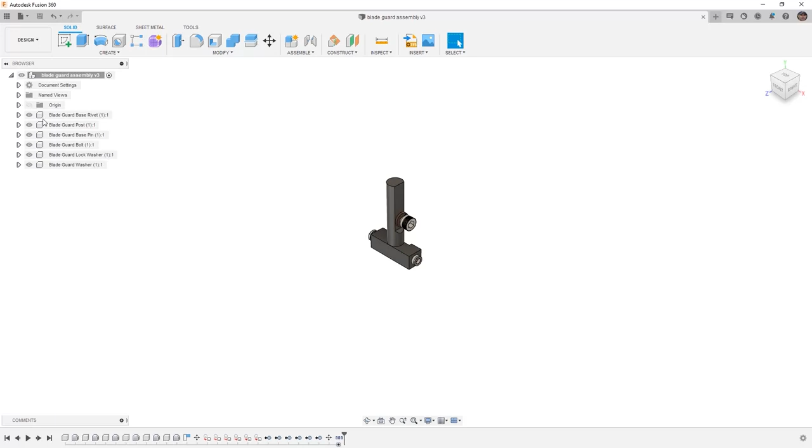To do this, I'm going to go into my drawing workspace from Design. We're going to be using the full assembly, creating a new drawing from scratch, and then we need to pick the standard, the units, and the sheet size.

We have two options for standards, ISO and ASME. The ISO is the International Organization for Standardization, and ASME is the American Society of Mechanical Engineers. This follows the ANSI format of standard. There are some basic differences between this selection, so it's important to understand which one you need to use.

ISO dimensions are going to be placed above the dimension line, while the ASME standard places them centered. ISO dimensions are parallel to the dimension line, while the ASME standards are horizontal. And in general, the ISO standard tends to use symbols, while ASME tends to use abbreviations. Of course, there are many more differences between the two, but those are some of the basics that you might notice when you're creating your drawings.

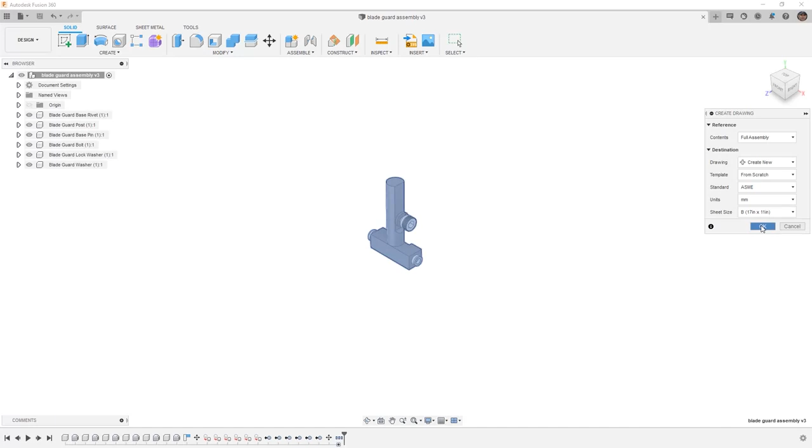For this example, we're going to use ASME, millimeters, and we're going to use the B sheet size and say OK. Once the drawing is created, we need to start by placing our first view.

I'm going to place our first view from the front view in the upper left of our drawing. We need to determine the style, the scale, and edge visibility for our design.

The edge visibility, by default, the tangent edges will be off. We can have them shortened or full length. It's going to depend on what your requirements are. We also can turn on interference edges and thread edges if needed.

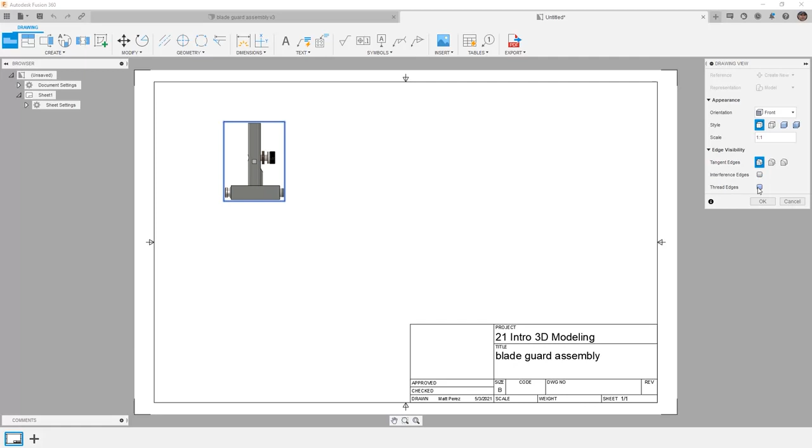We're going to say OK and place our first drawing view. Once we have our first drawing view, generally what you would do is select the view and you would create projected views. For us, I'm going to project this out to the right, and then I'm going to project an isometric view down and to the right.

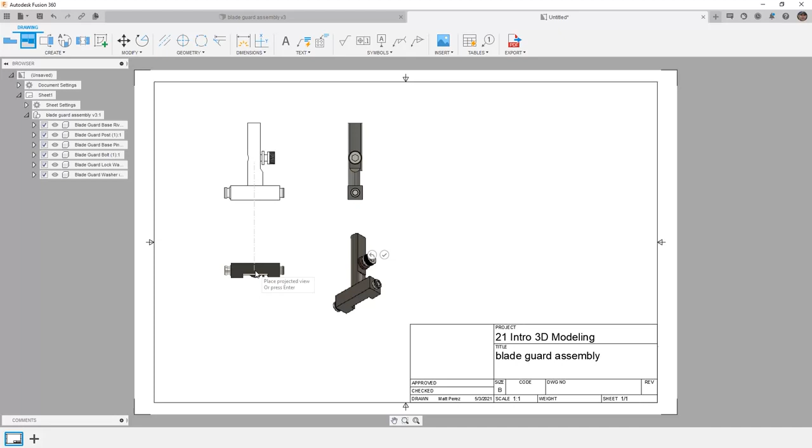We could also project a top or a bottom view. Again, it depends on what your base view is and what your requirements are.

Once we're happy with our views, we can select the green check mark, or we can right-click and select OK. By default, each of these views is going to get its scale and its style from the parent view. If we want to change that, we can double click and we can modify any of these parameters.

For example, if we wanted it to be shaded, or if we needed to change the scale. For now, we're going to leave all of ours the same.

Let's take a look at some of the other views that we can create. We've got our projected view, which we've already created. And then we also have a section view, a detail view, and a break view. The break view is handy if you have an extremely long design, such as something that contains a weldment or a large beam. It doesn't really apply to our design, so we're going to focus on section view and detail view.

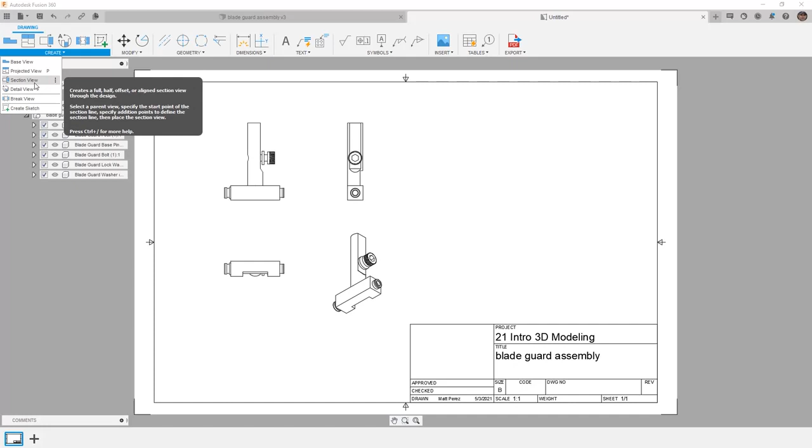I'm going to create a detail view, and I'm going to focus my attention in on the bolt. So I'm going to select the view that I want, and then I need to select the center point of a circle that I'm going to draw, and then I can place this view.

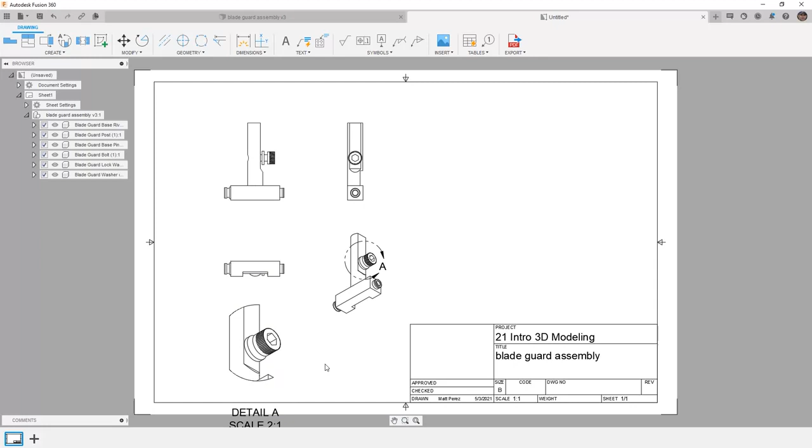I'm going to place it down and to the left, then I'm going to say OK. If the note is off the screen, we can select it, we can hold down the left mouse button on the gray box, and then we can move it to a new position.

Now we have a 2-to-1 detail view based on what we drew from our isometric view. If we want to resize this at all, we can modify its position and have it update the scale and the detailed drawing. From here, let's take a look at creating a section view.

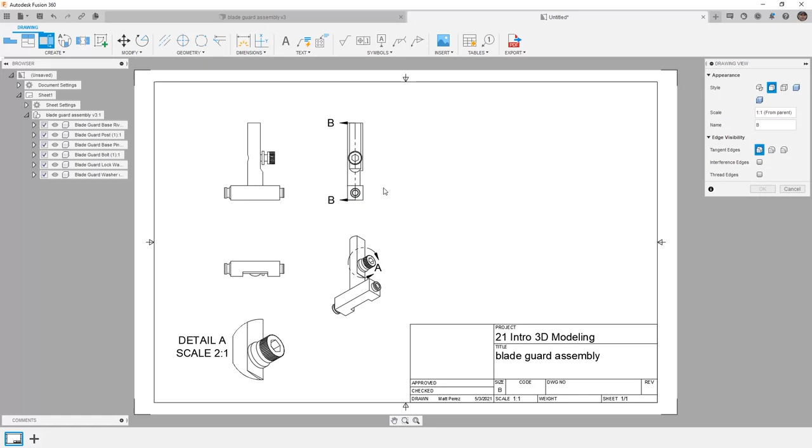Once again, we'll need to select a view, and then we'll need to draw a section line. Once we're happy with the section line we've drawn, we can drag the view off to the side. We can determine which objects we want to cut.

For example, if we want to leave some of them uncut, we can turn these options on and off. For our example, we're going to cut through everything and say OK.

Notice that it has hash marks or a hatch on the design. If we double click on it, we can modify the hatch based on specific standards. You can say OK, and now we've modified that section view.

Once again, if the note needs to be moved, we can simply move it closer to our design.

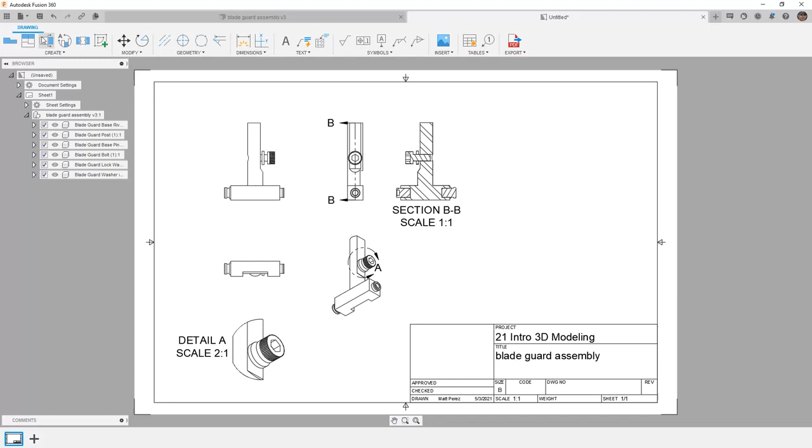From here, let's make sure that we save our detailed drawing before adding any more elements. To do this for the first save, we simply click Save and it's going to automatically add Drawing to the end of the file name and place it in the same folder. We're going to select Save and then we can move on to the next step.